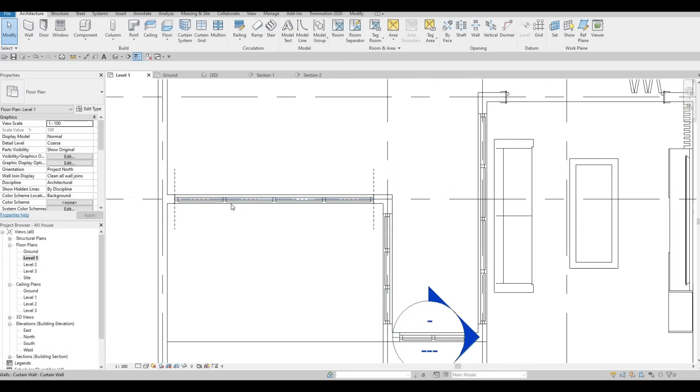What I want to do is go back to level 1. I'll probably need to delete some part right here because I want to move this one to make it smaller, to basically get an L-shape kitchen right here. So I'm going to delete this so it's easier for me to just add.

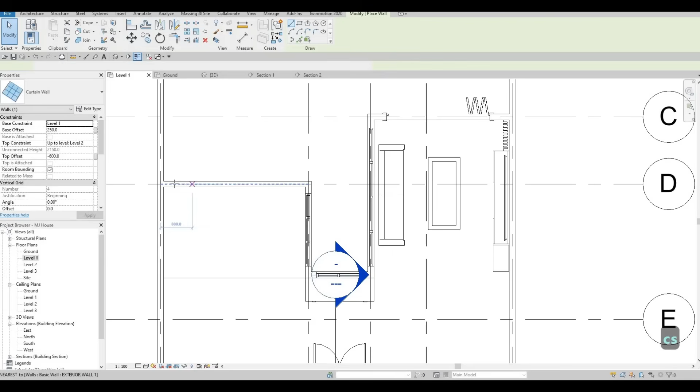I'm going to select this one, CS, and it will maintain the height and then the distance from here. That's why it's easier to just set one first and then do the others.

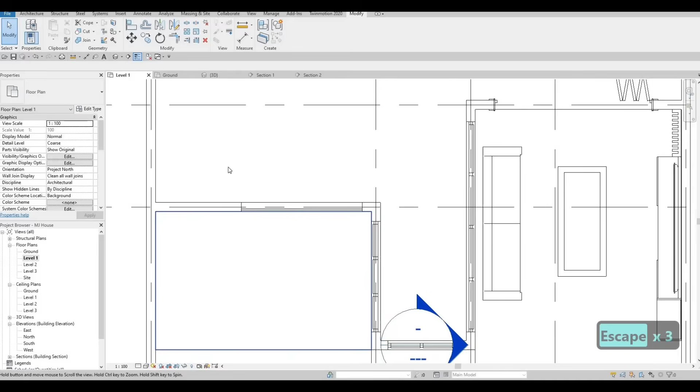So I'm going to cut this one right here, and I want to make sure to make this one L-shaped, because we're planning to add more of the kitchen parts right here. After that, I'm going to go to 3D, and as you can see, it maintains the parameters that we set right here.

Now what we're going to do is go back to architecture, click on curtain grid, select that one, and then add in the mullion all grid, and simply add it like that.

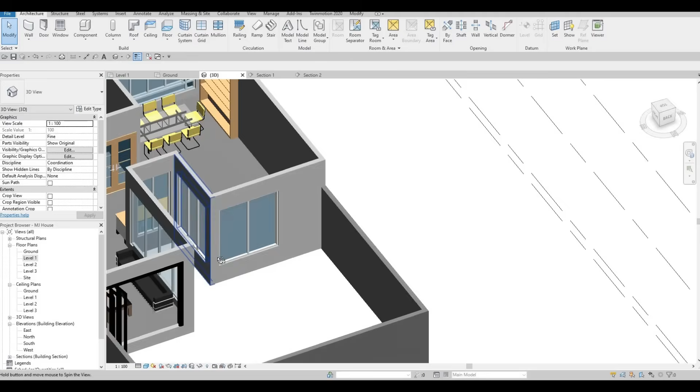Once you're happy and once you set this up, I'll probably add the laundry right here. So this is where the location of the laundry will be, but it's only going to be accessible from the outside.

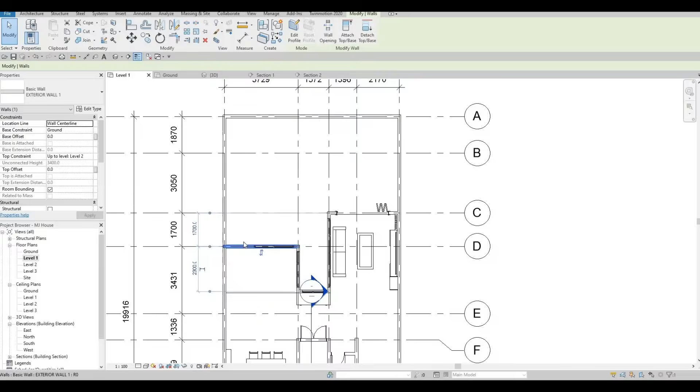So now what I'm going to do is create an exterior wall. I'm going to go to ground floor, CS on this, and add a wall right here.

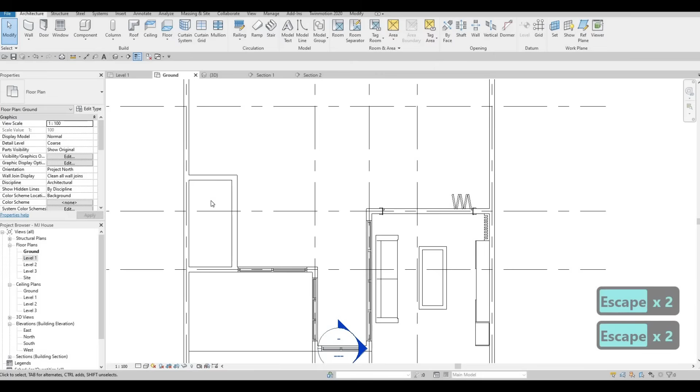So it's around, let's make it around 2600 and then 1400. So around 2600 from here, and this will be around 1400 for this - just more than enough space for the laundry.

And if we check this one, it will look like this. So what I'm planning to do is extend this one all the way right here, and then here this wall will be extended as well.

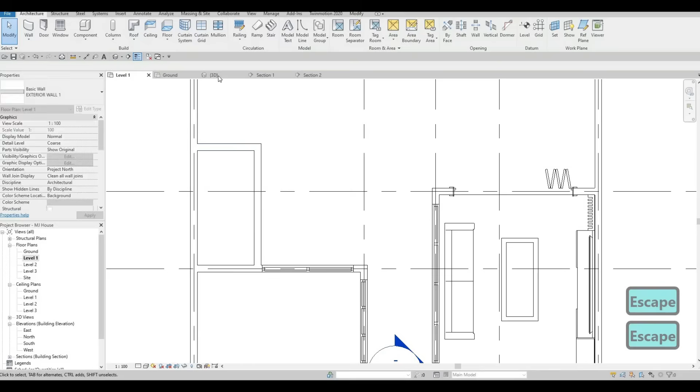So we're just basically adding enough wall on this side, and then here it should be exterior wall, and here exterior wall, and this one is exterior wall number 2. And here, as we remember, we have a different finish.

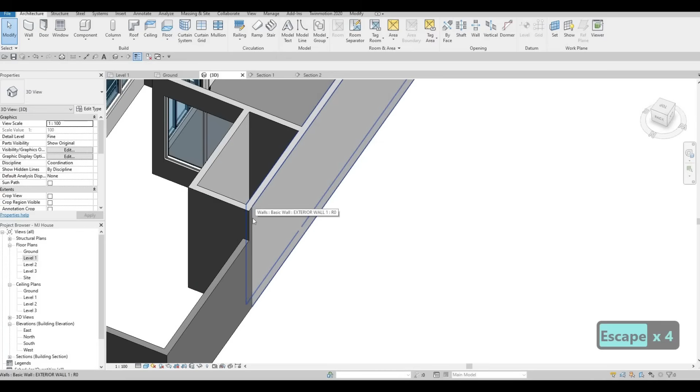So this one is concrete aggregate, and what we're going to do is split it this way so that we could have the same materials on all of this. We're going to split those ones later on, and I just want to change where this is located.

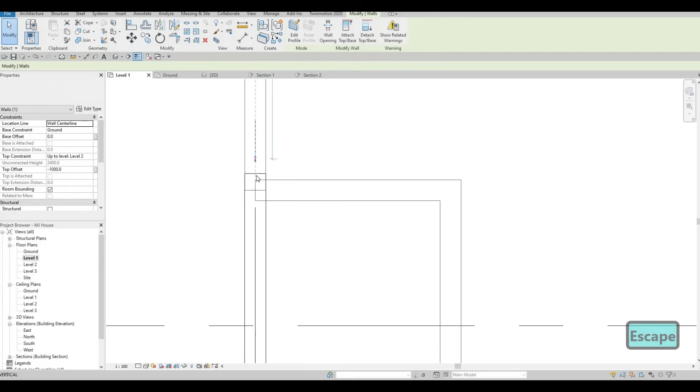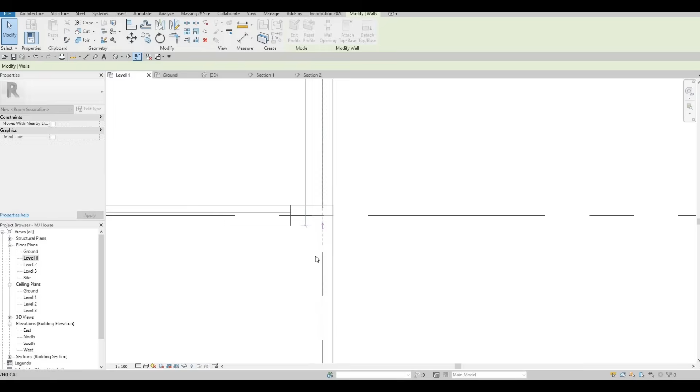And then I'm going to trim this out and put it back. I just want to fix where the joining wall is. Similar to this, we want the joining wall to be on the edge, so I'm going to undo this.

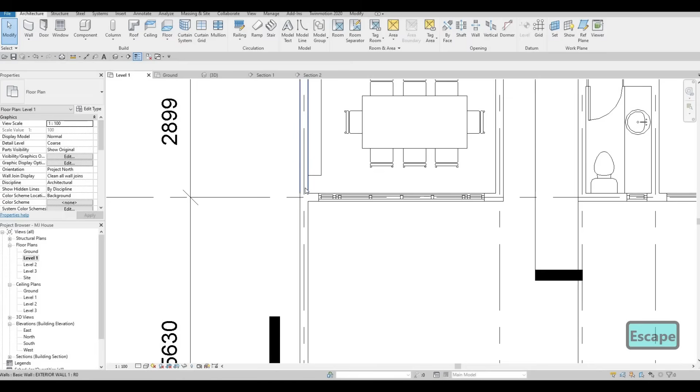So now this is the bigger wall, so it's easier to do later on. Same thing goes right here.

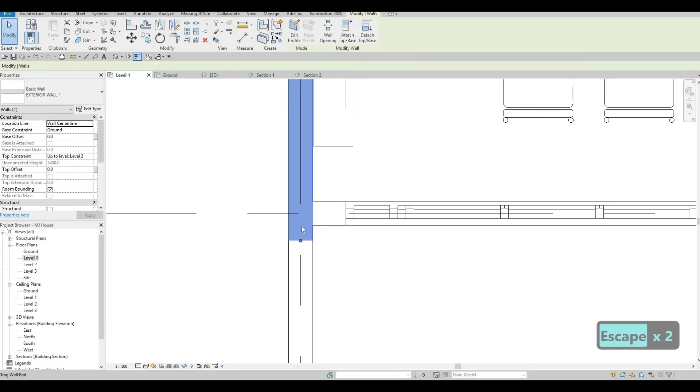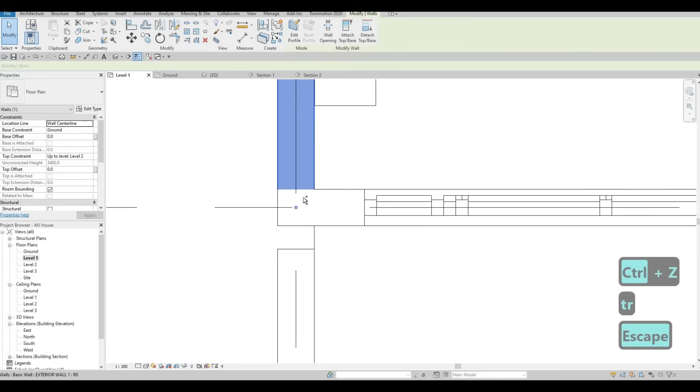Pull this one back first and then change the location of the joining wall. Usually once you move it up and pull it back, trim it first, and then now this is the... because I want this one to have...

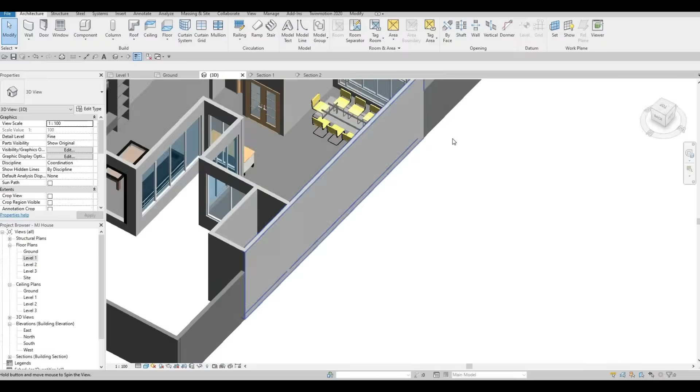I'm going to edit this type before we forget. So CS on that, and then you need to select split face, select this face.

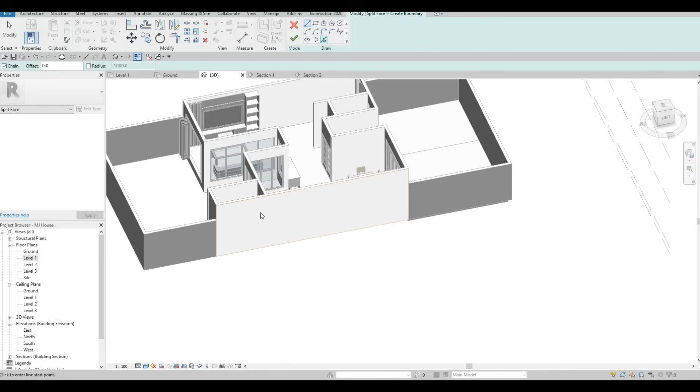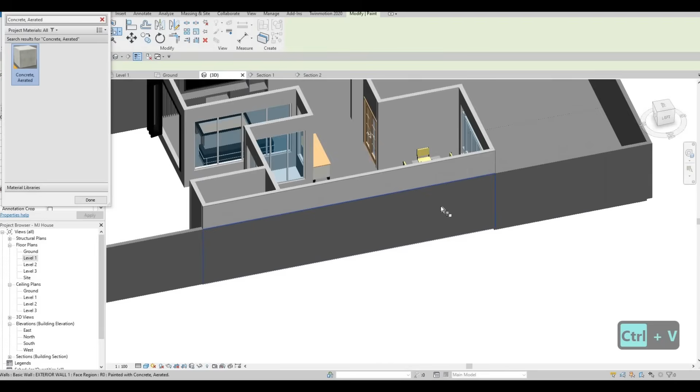Once you do, we need to create a line. So I'm going to create a line from here all the way to there, and then click on finish. After that, click on paint and look for the same concrete and select that. So now it will be the same one as what we had before.

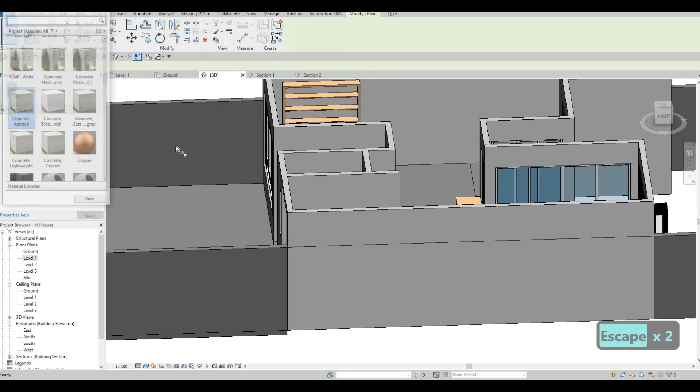At the same time, let's do it on this side as well. Split face this one, and then we need to create this line right here, and then click finish and then click on the paint, same thing. So it looks like everything is the border wall, and then only this one is on top of it. This one got created on top of it, so that looks nicer.

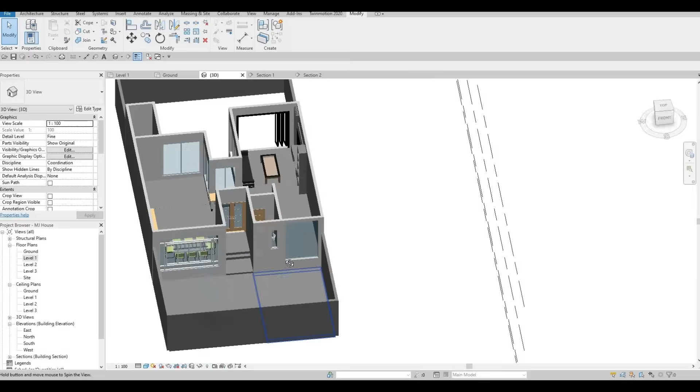So now let's go to this side. We're probably going to pull this one lower than the others, so we might just add the top right here, or we could just leave it like this. That's good enough.

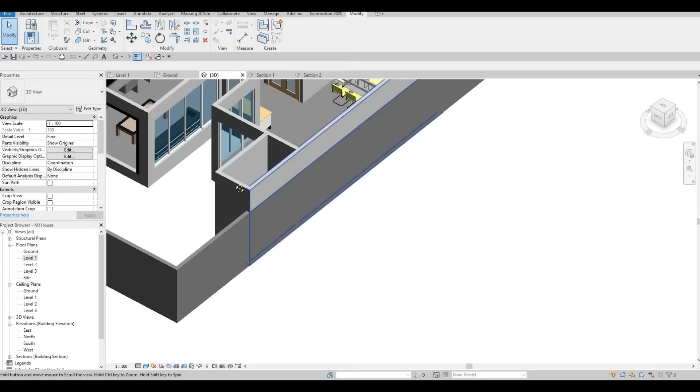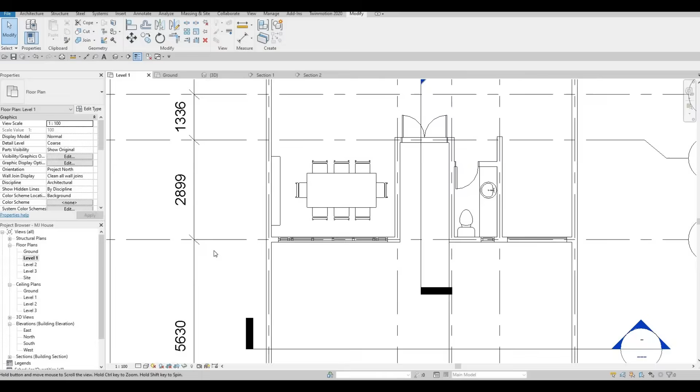We're just going to add a roof right here, and then here we could have a deck that goes around, and then we have our swimming pool right here. So let's create the swimming pool first.

Let's go to architecture. We create the wall first. So here, edit type, duplicate. This will be pool wall. Edit, and then here we could just change this one to around 50 thickness, and then here we could put something tile.

So let's look for a tile. Ceramic tile will be good as well. Let's do ceramic tile, and then after that,

Let's click on rectangle. We want it to basically be on the ground first, and then click on wall. Pool wall is selected, and then we want the base to be, so top is ground, and then this one base is ground, and then top level is ground.

So what I'm gonna do first is I'm gonna change the base to negative 2000, and then let's create a rectangle.

So I'm thinking of, we have a deck here going outside, and then the pool is somewhere right here.

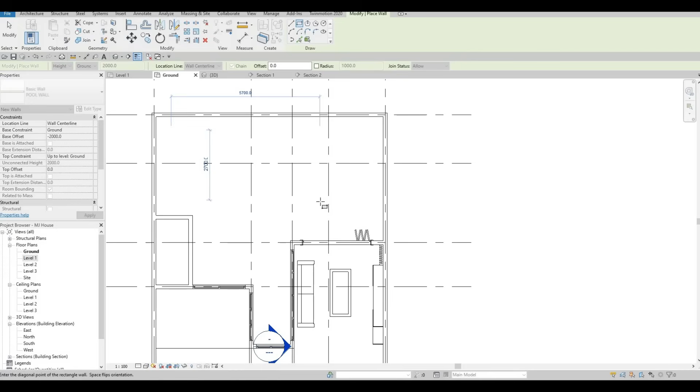Don't worry, it's because of the view range. That's why we're not seeing it. But if we go to 3D, it's right there. It's just not showing because of the view range.

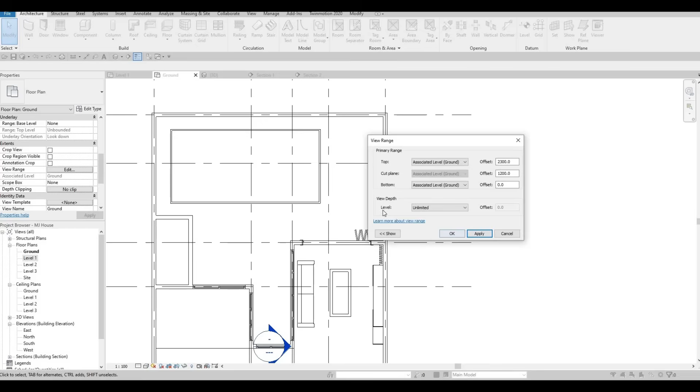But in order for us to see it, go to ground floor and then change the view range. And then this one, the depth, unlimited. So it's visible like that.

So now, this is a big, I want to have a rectangular pool. We have some spacing around it. And then especially right here,

We could just select tab, and then we could just move it around like that. And then the deck, I'm gonna place it all the way right there.

And then I want to give some space, probably just to have a stairs here, a steps here.

I'm gonna, let's maybe add it all the way there. We might make it smaller, this one, so that to accommodate the spacing here.

I think it's too much for the depth, so here I'm going to edit this one first to, the width is probably 2200,

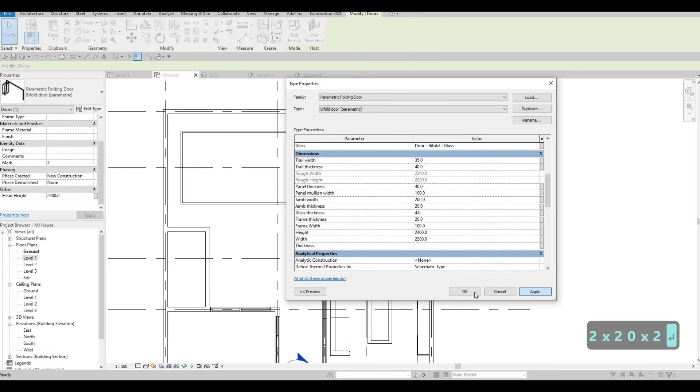and then let's move this one more on this side so that we still have some privacy on this area. Even though this is open, we still have privacy.

And then here we could add in the deck, so it will be another flooring, wood material, and then steps to add.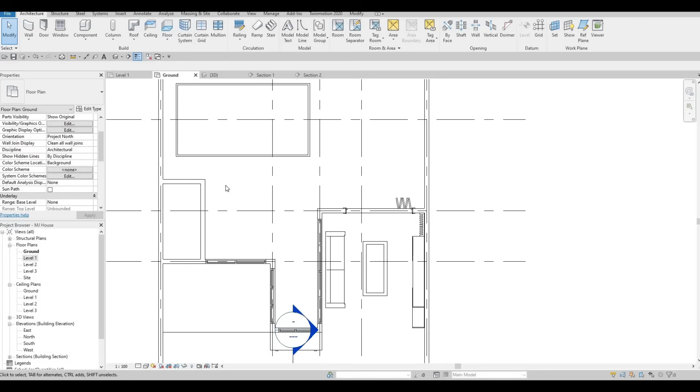So now I think I'm ready to just leave it like that, and then we could add in a surrounding floor. I'm thinking of adding some grass as well on some portion, and then maybe this one should be a floor with grass, those kind of stuff, or so we could just look into that more.

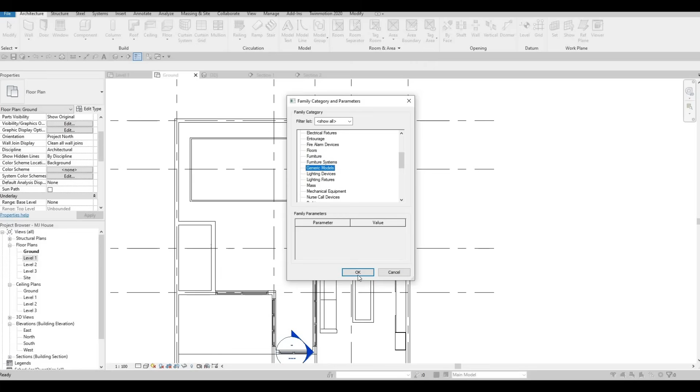I just want to finish the swimming pool first. Let's add in a model in place. I'm using a model in place so that I could add the floor under there. So extrusion, and then I want

and then here I'm going to create something that looks like this, and then let's go to 3D to see how it looks. So click on finish, and then put this one all the way down.

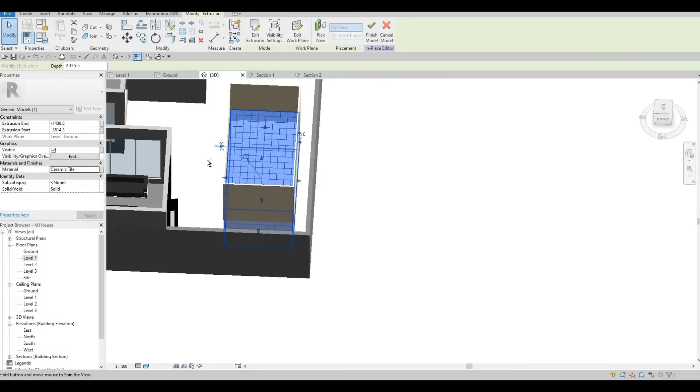I'm going to set this one, just too much, so AL. So AL, sorry, AL.

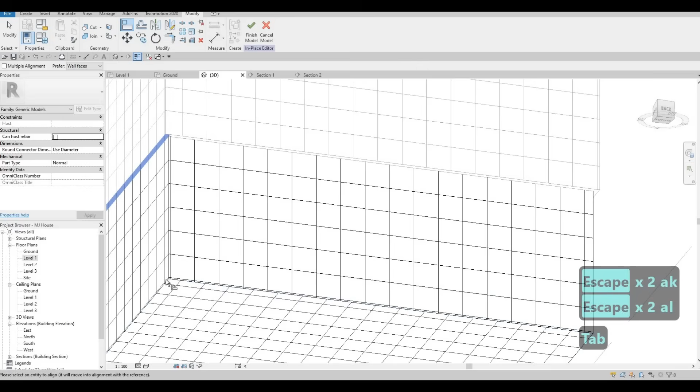Click on that, and then click on the bottom, and we want to make it shorter, not too thick.

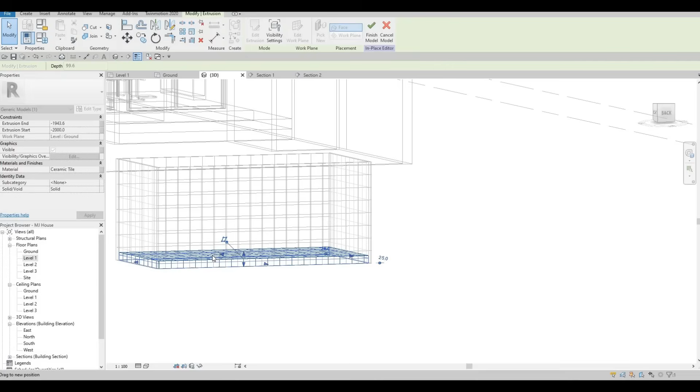I'm going to make this wireframe to see how it looks, so we could just pull it one down. I think that's good enough, and then we could put in some stairs or whatnot.

And then after this, go back to ground, and then let's create another extrusion, same thing, but with water.

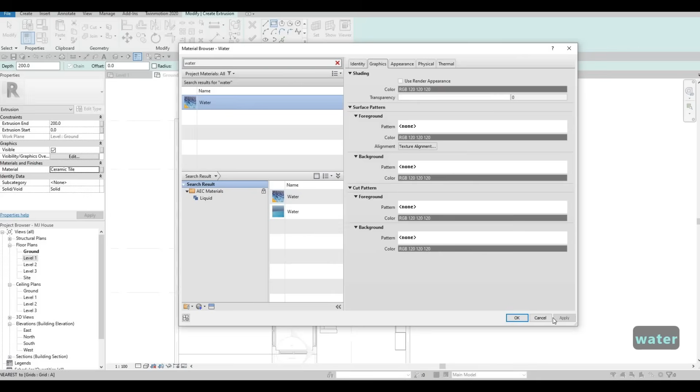Pull this one up, click apply, OK, and then add it on top. And then click finish, look at it in 3D, and we could just pull this one down.

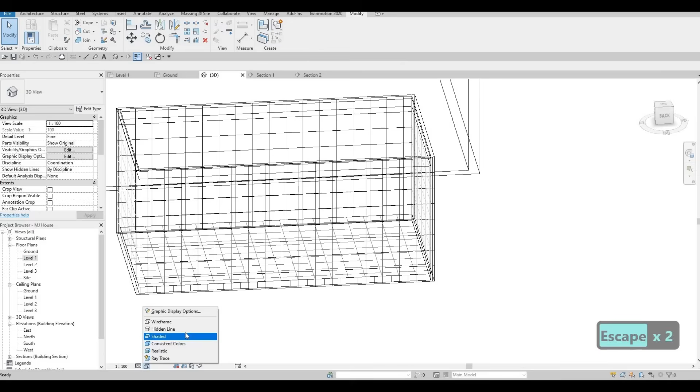There we go. Click on finish, and then let's change this back to hidden line, and we could see it in the ground and in 3D how it looks. So now we have something that looks like that.

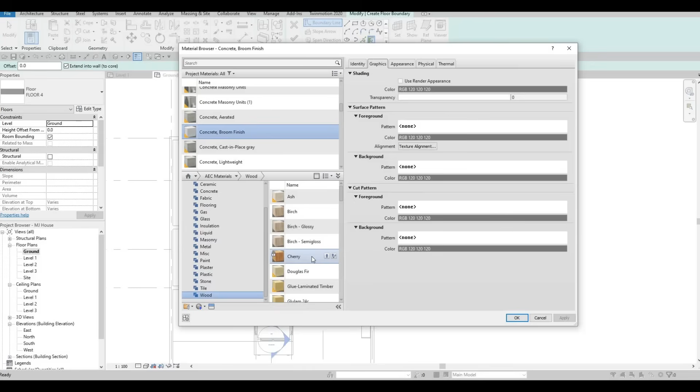And then we could just create the deck. So let's go to ground, let's add in another floor, edit, duplicate. This will be floor number 5, and we have a 400 thickness, and then this one should be a wood material. So I'm gonna choose mahogany, click apply, OK, and then copy this, Control A, Control C.

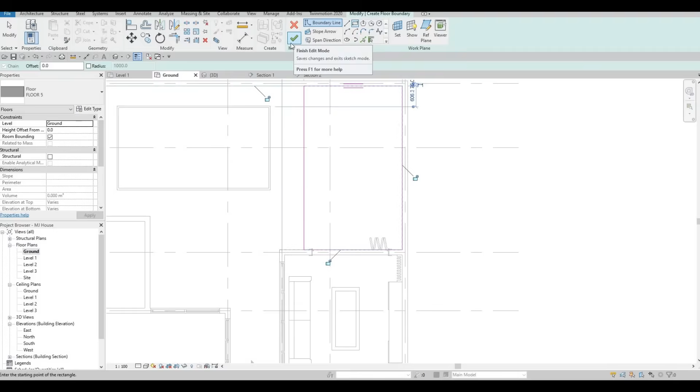And then here I'm going to add something that looks like this, and then click on finish, and let's look at it. So that looks like that. In terms of where it is, it should be on level 1. So there we go.

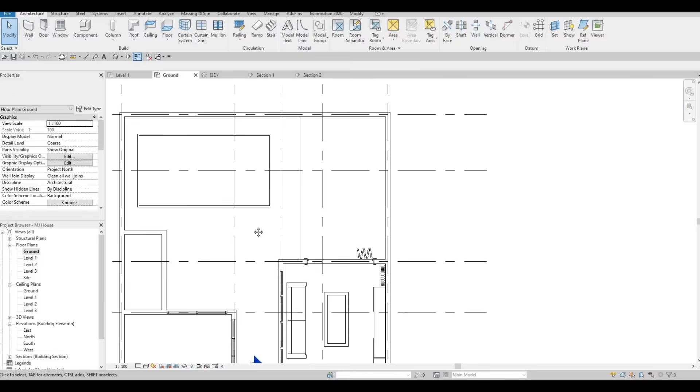And then we're going to create something right here. I'm planning to add a stairs again, but I'm going to create it similar to this, a model in place. So here is what I'm going to base off, a model in place, generic model.

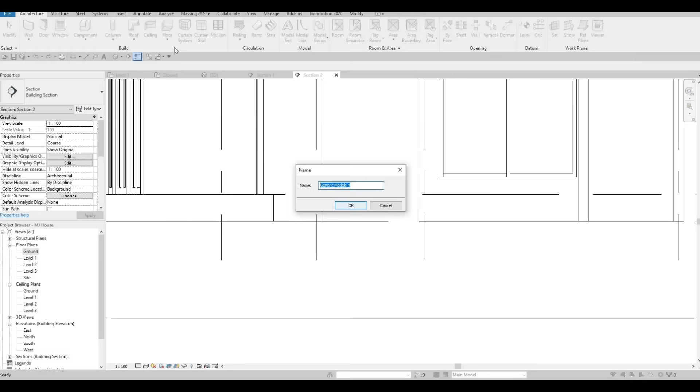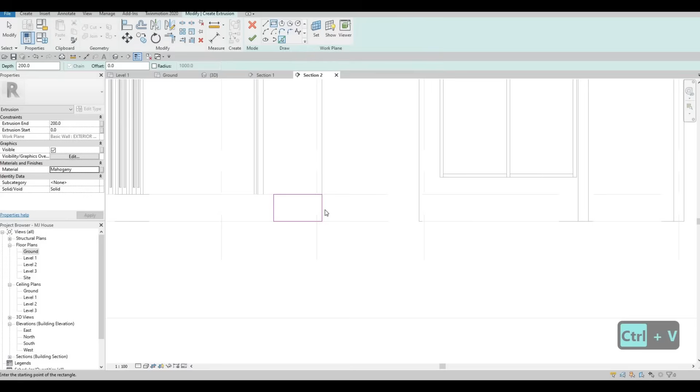And then here I'm gonna click on extrusion, pick a plane, and I'm gonna select this wall right here, and then click on rectangle, and then here change this to mahogany, and then we're just going to add the steps right now.

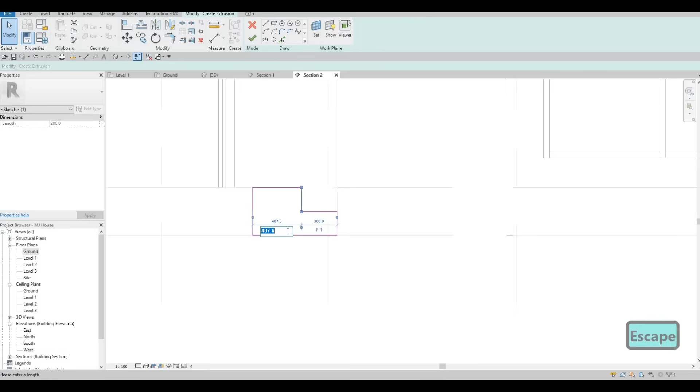We could just add it simply like that, very simple, and we just need to add it in the middle. So this should be around 350. There we go, so that's roughly in the midpoint of that, and then click on finish, and let's look at it at 3D and then expand it a little bit more.

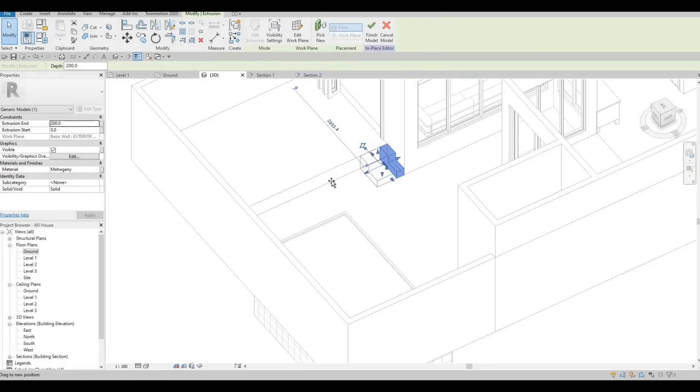And at the same time, we're going to have some railing right here to make it nice, and then right here we could just go back to ground and then add the railing.

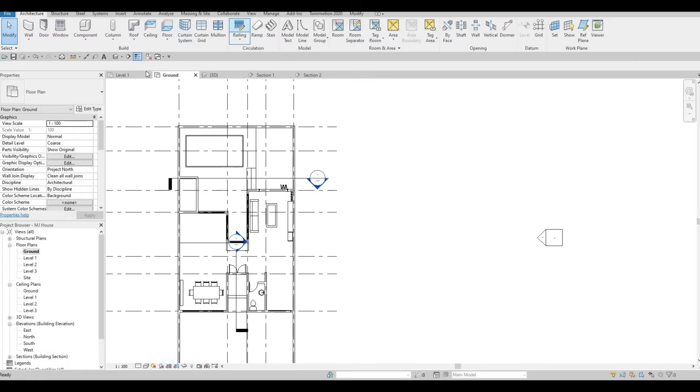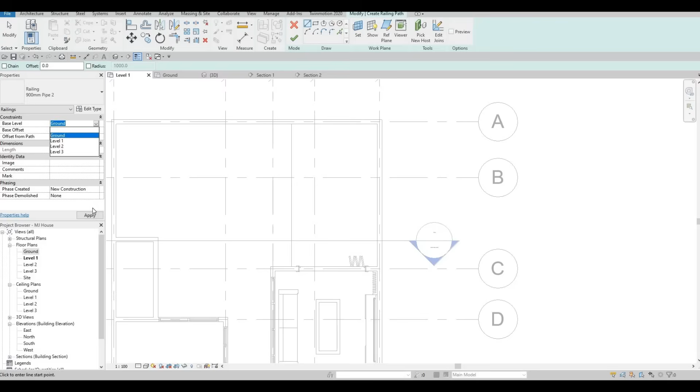Let's use this pipe, let's duplicate this, let's put piping number 2, and then let's add this one to level 1, so base should be level 1, and then add it right there. So even though we put it right there, it should be on that side.

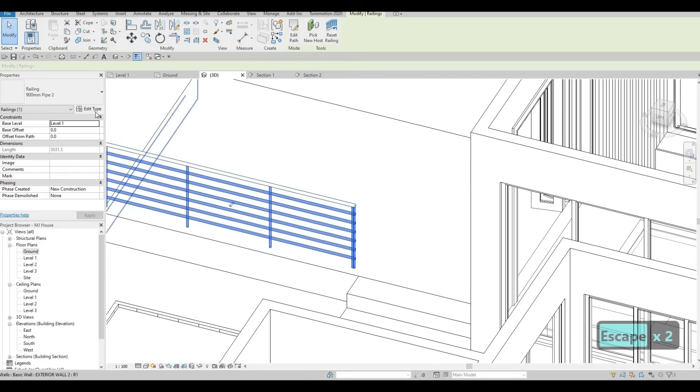Click on finish, and obviously we could do much better work right here. Instead of this one, I want it squared. Rail structure, circular, I don't want that. I want it squared. The technique here is you could just copy and then Control C, Control V on those to make it faster for you.

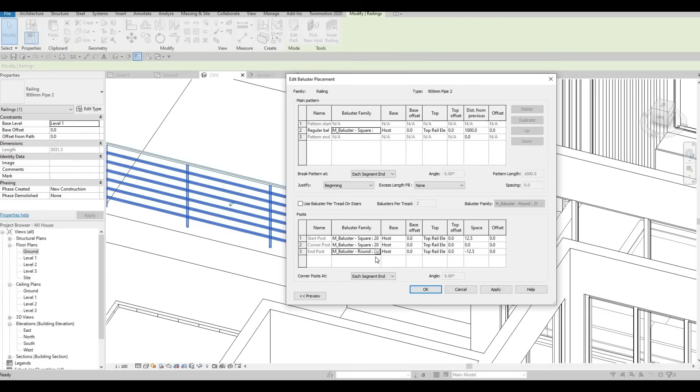And then click apply, OK. And then here I want it to be squared as well, and then baluster, I don't want it right there, I want it squared as well, and then squared. So I want it to be consistent with all of them, and that looks like that. So I'm happy with that.

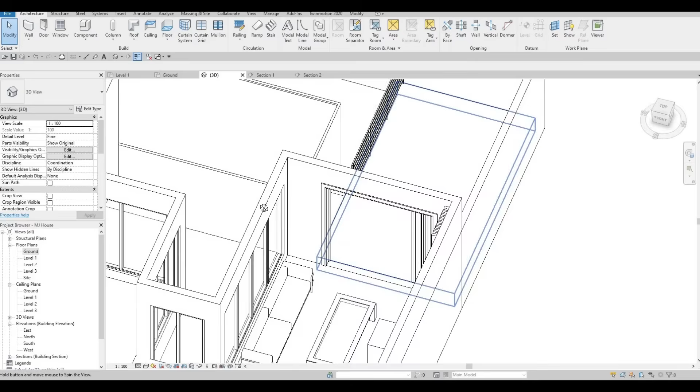The only thing that I forgot is to add the material, but we can add it later on. I'm not gonna be focusing too much on that. So at least we have some handrail there, and we have some steps. We could always just push this one all the way there so that there's no issue with that, but why not add a railing as well here?

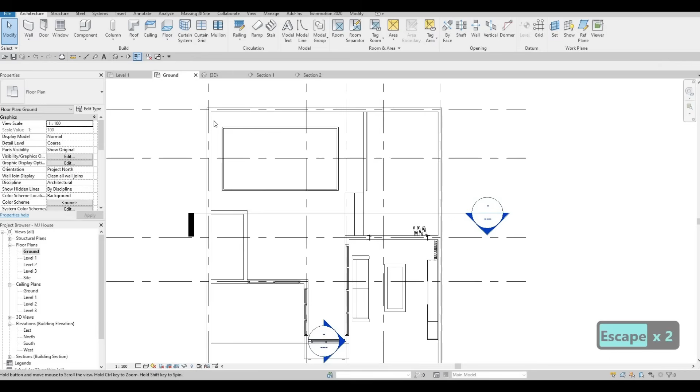At the same time, we could add in floors. So select this, edit type, duplicate. I'm gonna duplicate one of the floors. I'm not gonna duplicate this one because I want to maintain the 200 on others, and I'm just going to select a different material, so probably concrete. Not the block pattern, but something different.

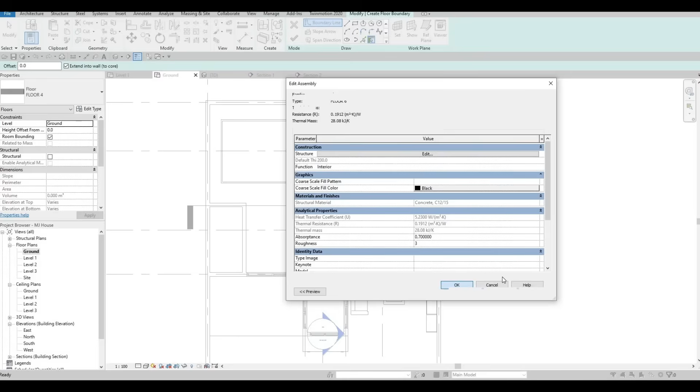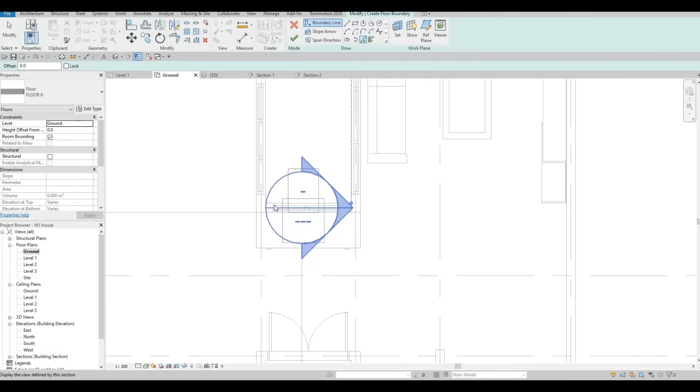And then here I'm just going to go around here, and then let's pick this one right about there, and then just all around this area. And then let's trim and extend.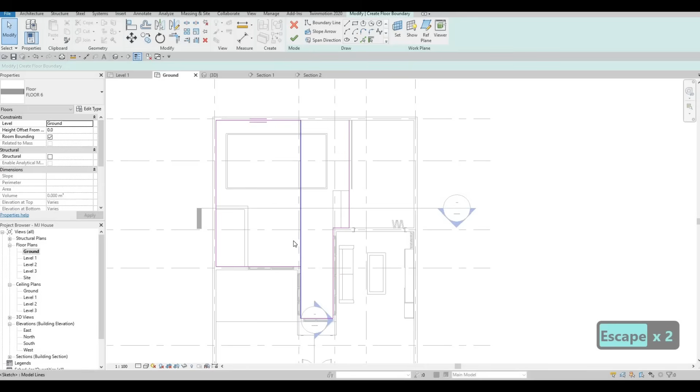And probably I'm gonna add this one as the same floor. So I'm just going to just leave it like that for now. And this one we just need to trim and extend on this one, and then trim and extend on here. Click on finish, don't attach, and then we forgot to create an opening there.

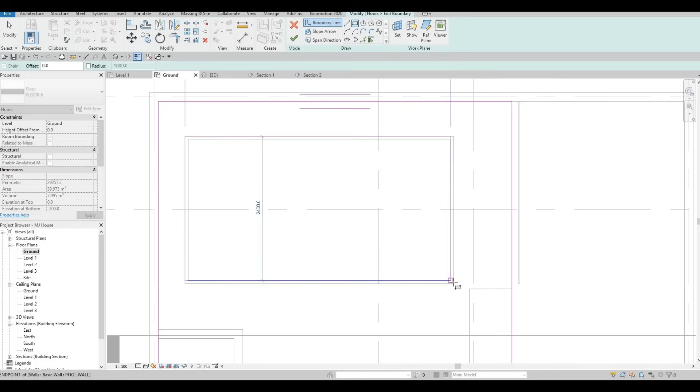So might as well just select a rectangle and then just add this one like that. Don't attach. And then here for the walls, I want my walls to have at least 25 top offset, so at least it's a little bit on top of there. So let's stop here for now and continue in the next video.